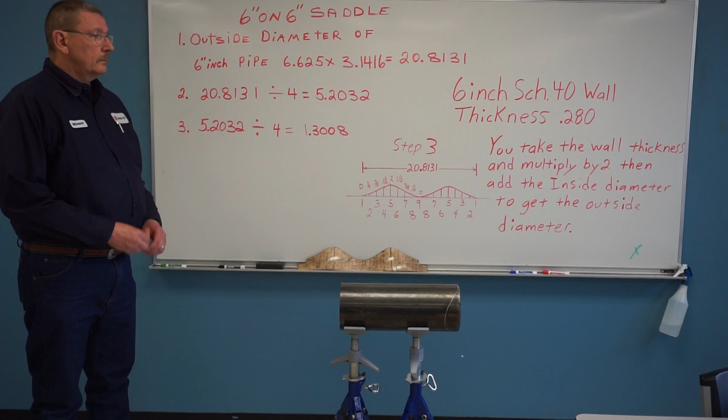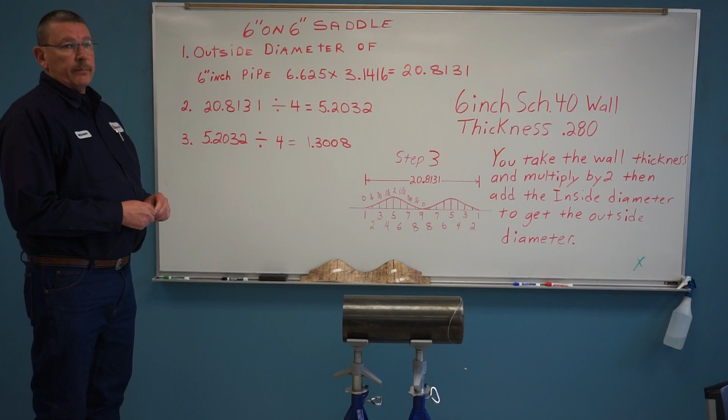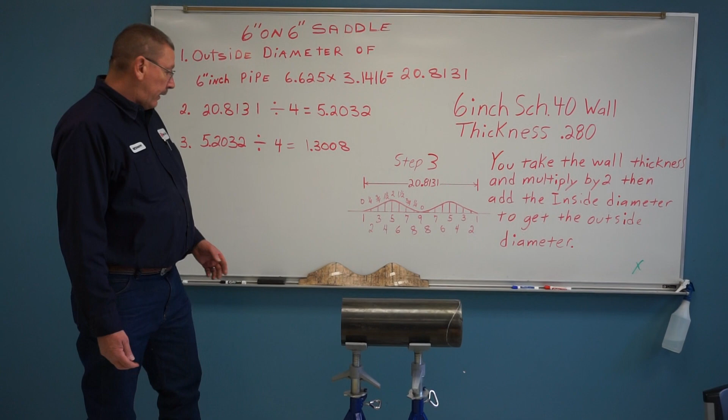Okay, class, today we're going to finish up the 6-on-6 saddle. We're just going to call this step 3. We've already done step 1 and 2. Basically what we're going to do is explain how we got our pattern as we did in step 2. We drew the ordinate lines on the board.

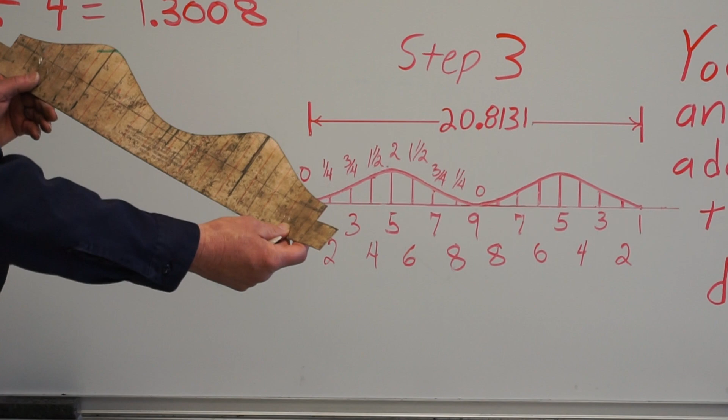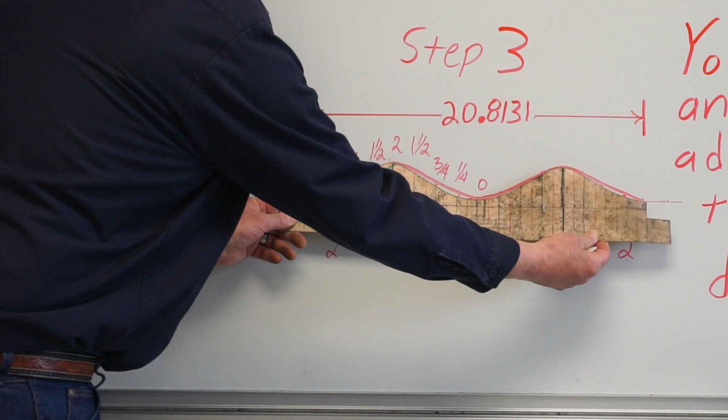Okay. What we've done is we've made a pattern on paper. Anything you can wrap around the pipe will work. As you can see, it matches what we drew on the board pretty well. So now, I'm going to show you how you put it on your pipe and you lay out your pipe.

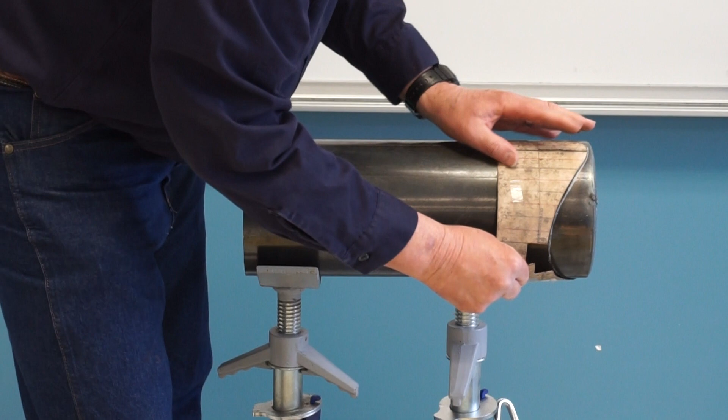These runoff tabs here are real handy to hold it together. You put it on your pipe, you take your soapstone, you trace all the way around, which I've already done. When you get done, it should look like this.

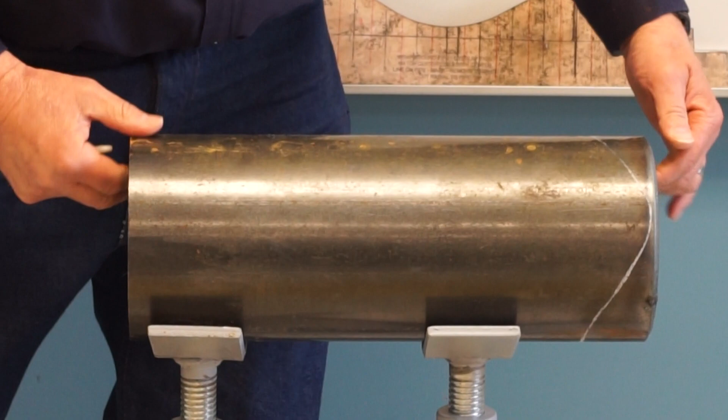Next step, you get your torch. You want to start by removing the end of the pipe. You want to make sure that you cut all the way around the pipe, maintaining a square cut. You maintain a square cut by pointing the torch to the center line of the pipe at all times. So you're going to cut this all the way off, all the way around.

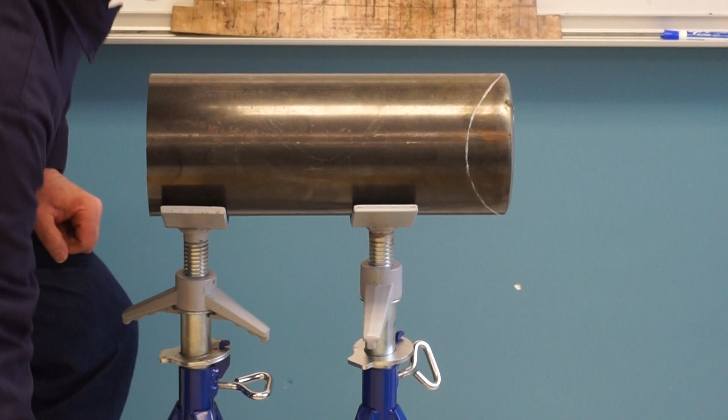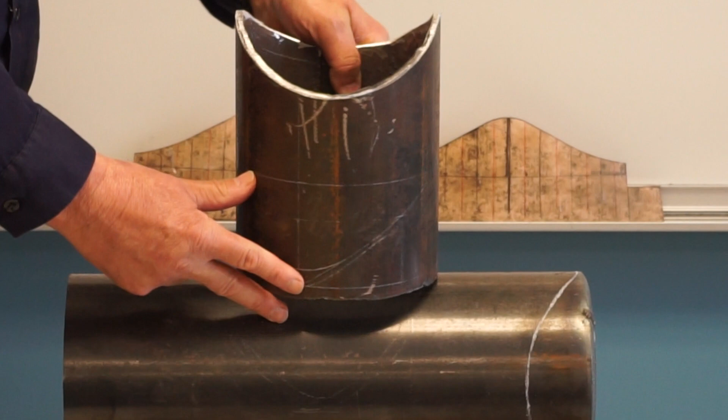When you get done, and after you clean it up with a grinder, it should look something like this right here. As you can see, make sure you take all the slag from the inside of the pipe and remove it. You got a seam in the pipe, wherever it is. It's a good idea to grind that back about 3/4 to an inch to make sure that it's not in the weld zone when you weld it together.

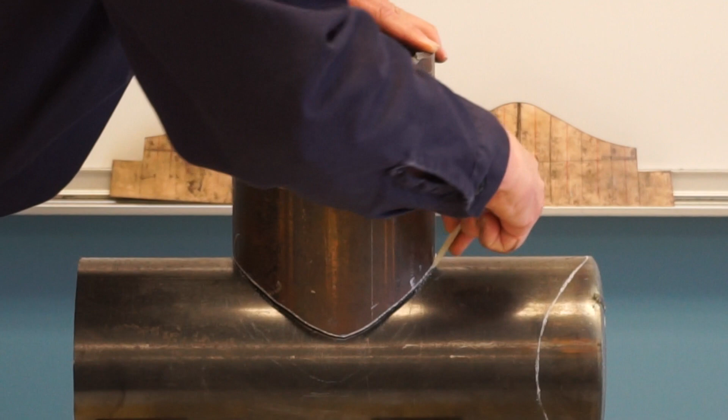Then you're going to turn it around. You're going to set it wherever your hole is going to be for your branch. You're going to cut the hole for the saddle. So you're going to set it where it goes. Take your soapstone and try to draw as close to the pipe as you can all the way around. You're going to do this all the way around. So now, you set that aside.

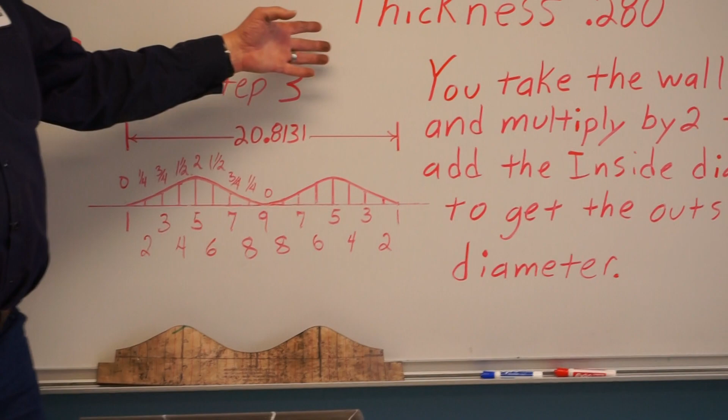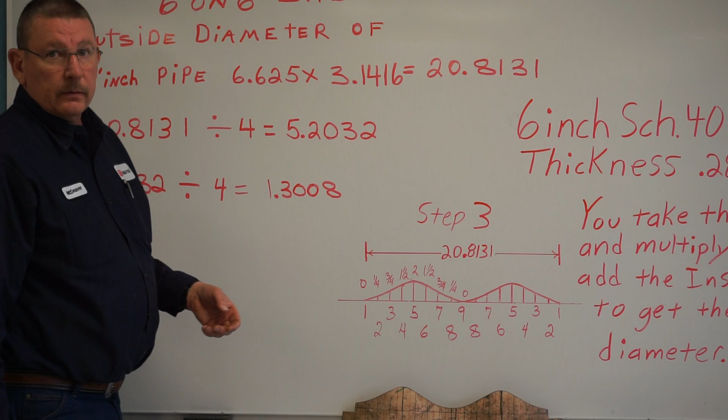As you can see on the board, some students sometimes wonder how you get all these measurements from step 2, which was why is the pipe 6 5/8 OD? Where does that come from? How do you get that? So we all know that pipe's based on the ID dimension.

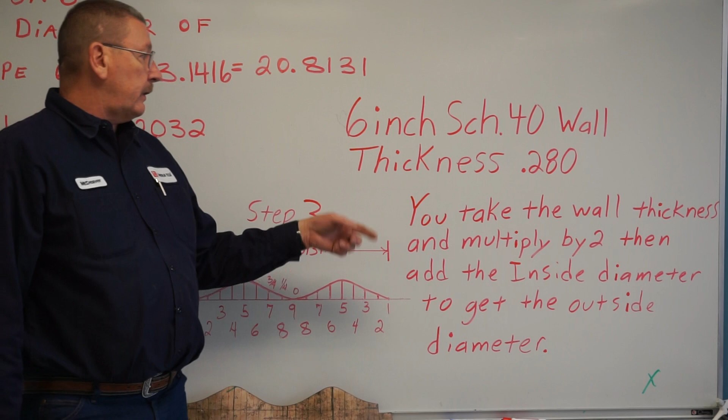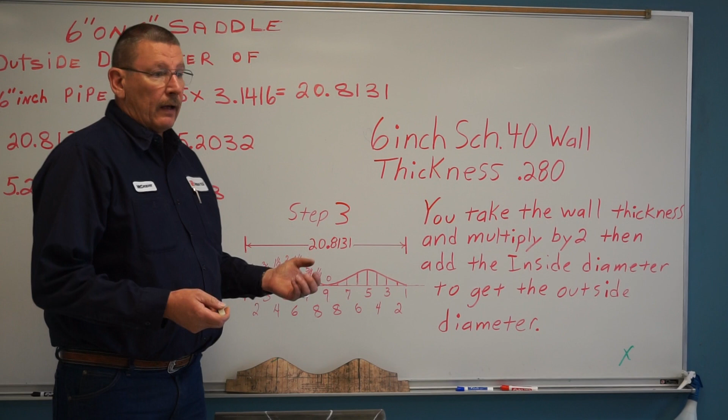So 6-inch schedule 40 wall thickness is .280. So a little bit more than 1/4 inch, a little bit less than 5/16. I tend to use 5/16 so that when I draw my next line, I don't remove too much material. So take the wall thickness, multiply by 2, then add the inside diameter to get the outside diameter.

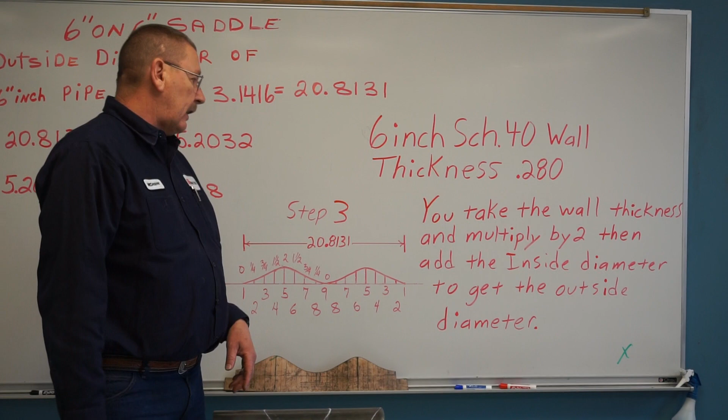So that being said, you draw a line about 5/16 of an inch in from the outside diameter that we just traced, and you're going to go all the way around. I'm doing this kind of in a hurry, but you can do a better job. You trace it, make sure you've got the proper 5/16 all the way around the pipe.

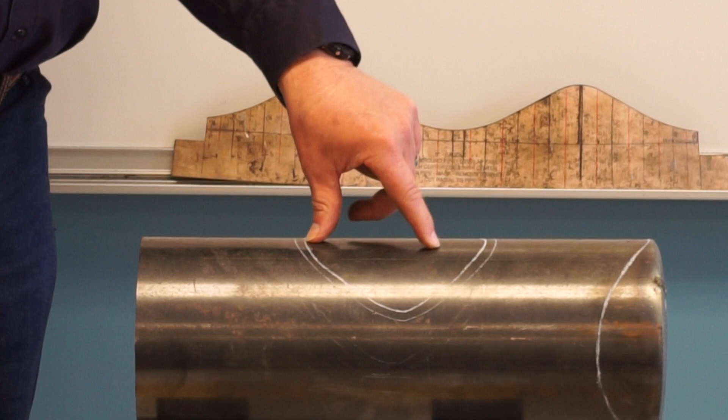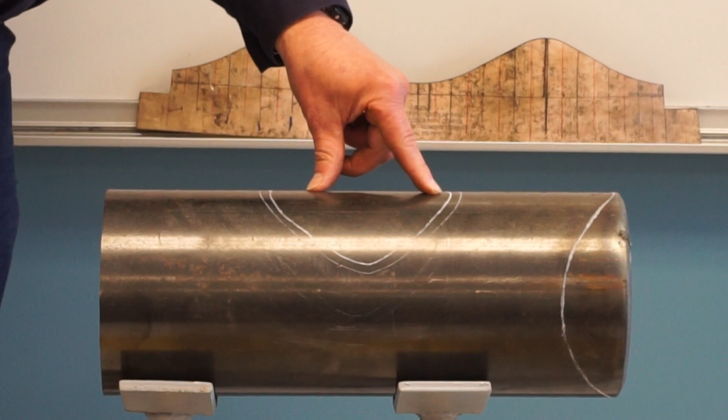After you do that, you're going to cut out the hole. You're going to make sure you do not remove the line. Make sure you only cut on the inside line only. You want to keep the line there. Same thing, square cut all the way around, pointing the torch to the center of the pipe at all times. After you drop that out of there, you clean up all the slag, make sure it's all good and clean. Do not bevel this piece.

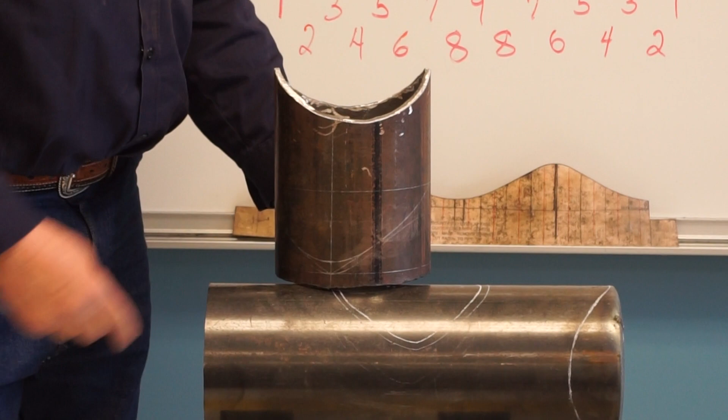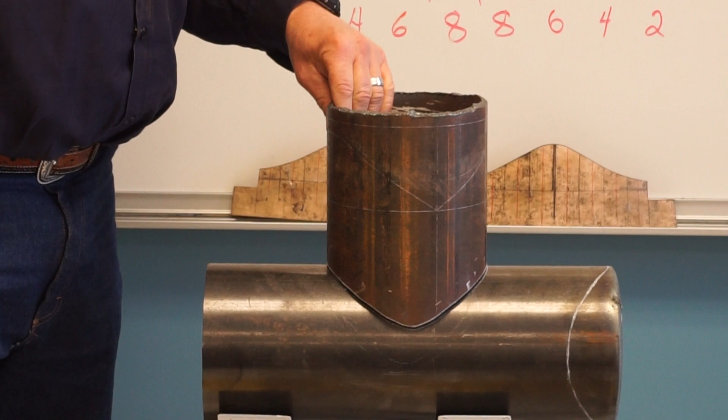You're going to take the first piece you cut, since you've already traced it, you make sure you trace that first line. And you take this piece, and now you can bevel it. Only bevel this piece, bevel it all the way around. That way when you set it on here, the ID of this pipe and that hole should be the same size. So when you weld it up, you should have 100% penetration all the way around without any restriction of hole size.

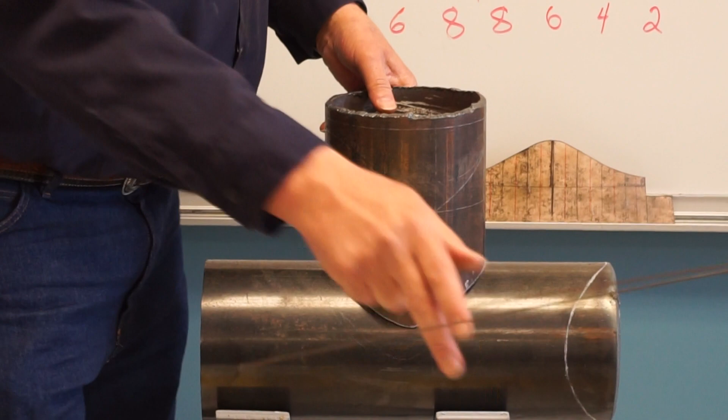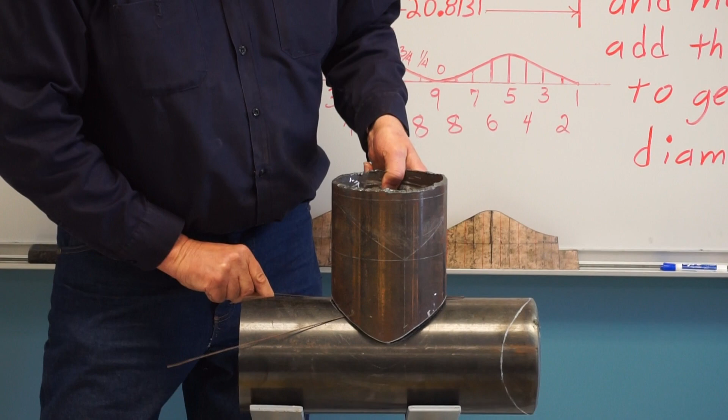When you go to weld it up, you can take your spacer. You want to make that gap where you can get your penetration. When you set that on there, you'll set it on like this. You'll get it centered up good. You want to make sure you tack it, maintain the gap where you can get your penetration all the way around.

Different people like a different gap. 3/32 is a good starting spot. It's not too big, it's not too small. If you're running a little hot, you might want to decrease it. And I wouldn't recommend going much bigger than 3/32 because it'll get out of control on you real quick. So now let's look and see what the finished product looks like.

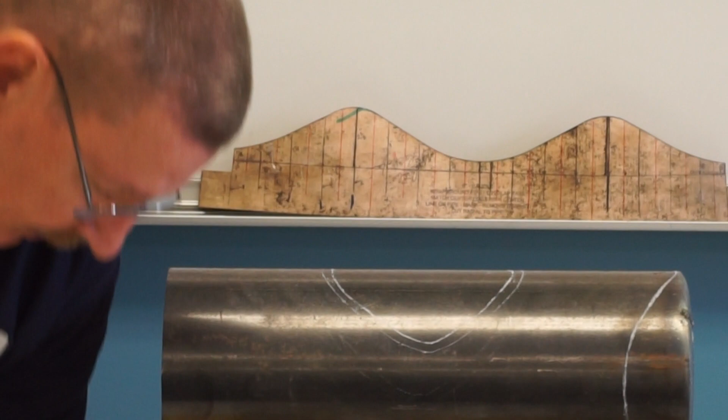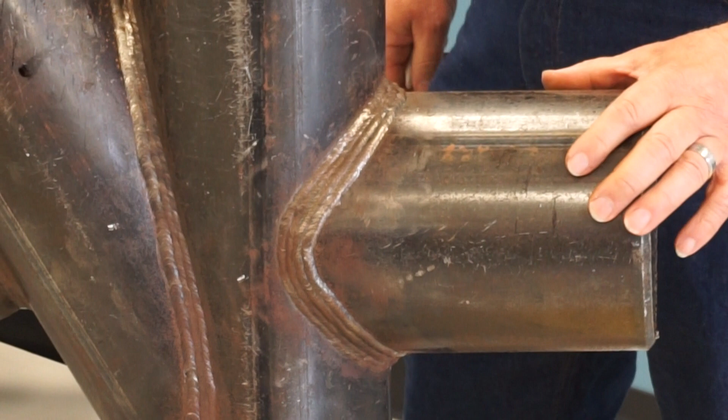So after you get it welded, you see examples over here of a 6-on-6 saddle that's been welded up. Looks very nice, very uniform. It was welded very nicely. It's got a nice string of beads that stack all the way around. The inside is real nice. It's got really good penetration all the way around. And we hope this helps you with your 6-on-6 saddle.